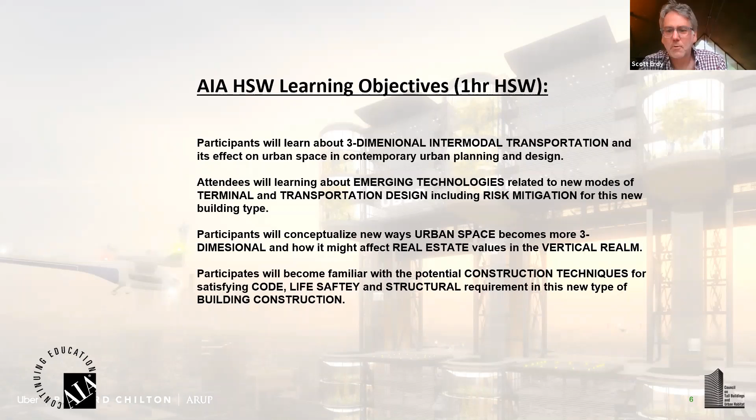So we've got two great guests here today. Jon Pickard, he's from the Midwest, where he would be called Pickard there. He's the principal of Pickard Chilton, a very interesting firm up in New Haven. They do a lot of really interesting things. In particular, the one we're going to talk about today is they were invited by Uber to prepare a concept design for their megaport. It's their vision of the next generation of aviation and expansion of what they currently do in terms of transportation for individuals.

He received his bachelor's from Iowa State University, his master's from Yale. He's lectured at a number of institutions and serves on Yale's School of Architecture Dean's Council.

Andrew Swartzell is an associate and director of computing technology at Pickard Chilton and does a lot of things. I imagine he's the one doing a lot of the heavy lifting on some of the data-intensive illustrations that you'll see. He's from Penn State University for his undergrad, got the Alpha Rho Chi Medal, and got his master's degree from University of Pennsylvania. Congratulations, a very good school as well.

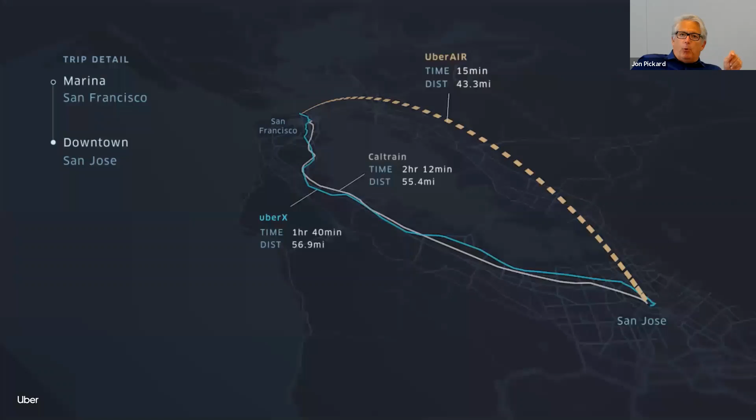So their hypothesis is nicely underscored in this image you see here. Why Uber Elevate? Well, it's really very simple. In San Francisco, if you're trying to get to a meeting in Silicon Valley, today you have to plan on potentially being caught in traffic for a couple of hours, or Caltrain for a couple of hours. With the miracle of Uber Air, or Uber Elevate, which is an eVTOL, you'll be able to go from a skyport at the Marina in San Francisco and magically land in the heart of Silicon Valley. And that's what we're trying to share with you today.

So what Uber has done is take their incredible analytics. You can appreciate that Uber has the ability to track, on a daily, hourly, minute-by-second basis, where the demand is and how they best serve their customers. We'll be able to use that information in strategically locating the new skyports that we're going to share with you today.

This whole initiative started in 2016 when a team was assembled at Uber to form Uber Elevate. Right off the bat they published this white paper, which is available at uber.com/elevate.pdf for anybody who is really interested in getting into the nitty-gritty of this. What they set out to do from the start is form a contingent of interested parties to come together and make this new mode of transportation a reality.

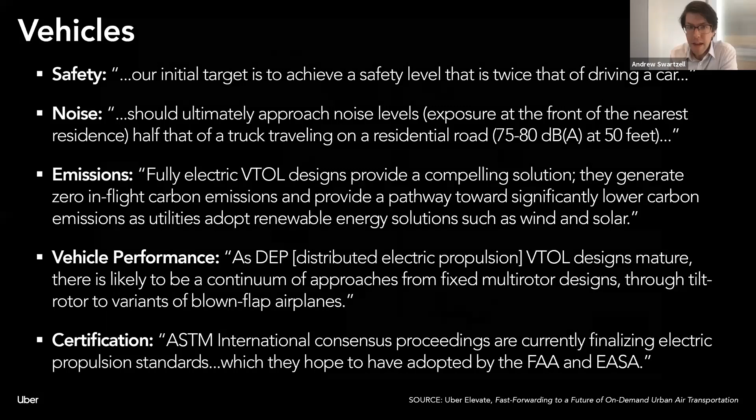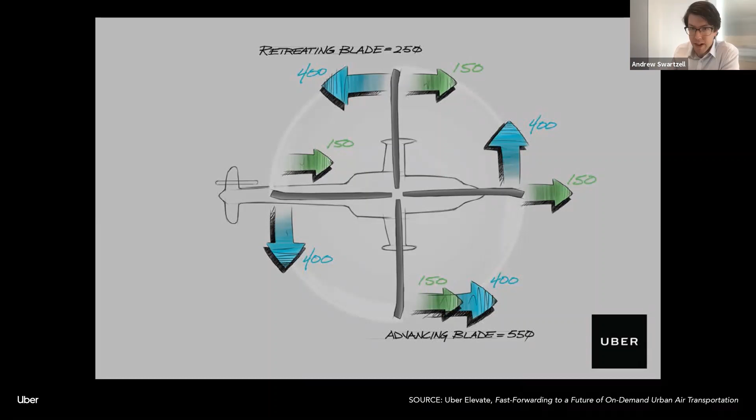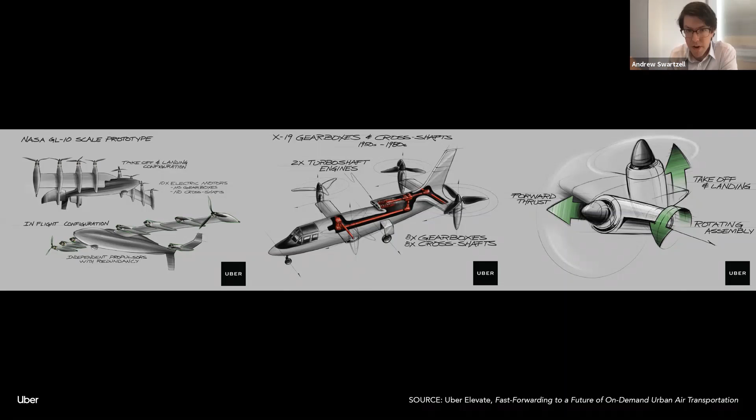What that does is it takes these gearboxes and cross shafts out of the design of the aircraft, and each propeller basically has its own motor. It makes it more redundant and, ultimately, safer.

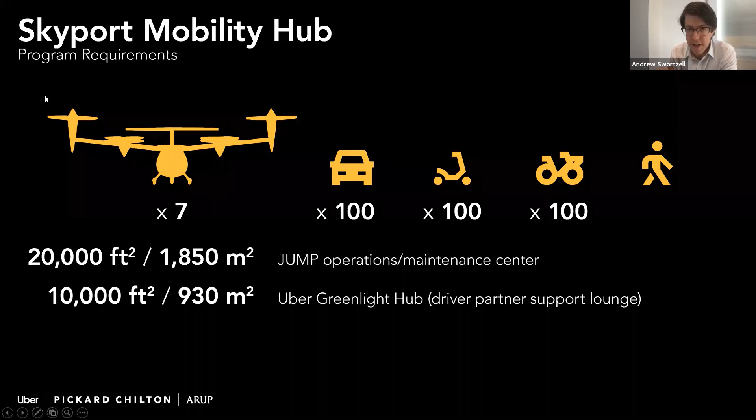The program for this particular hub is more modest than what we were seeing before, at just 7 aircraft, 100 cars, 100 bikes, and 100 scooters.

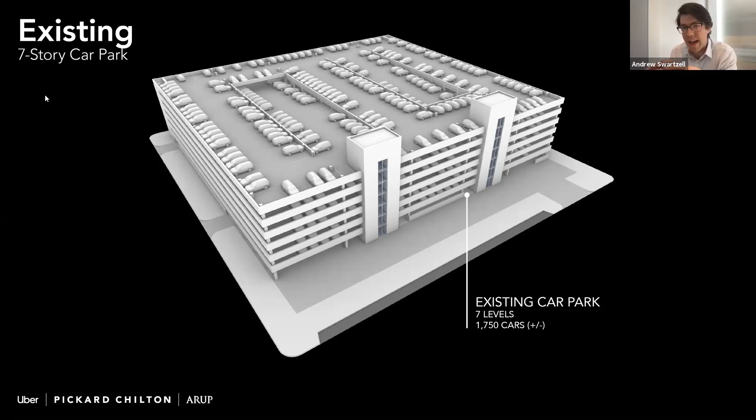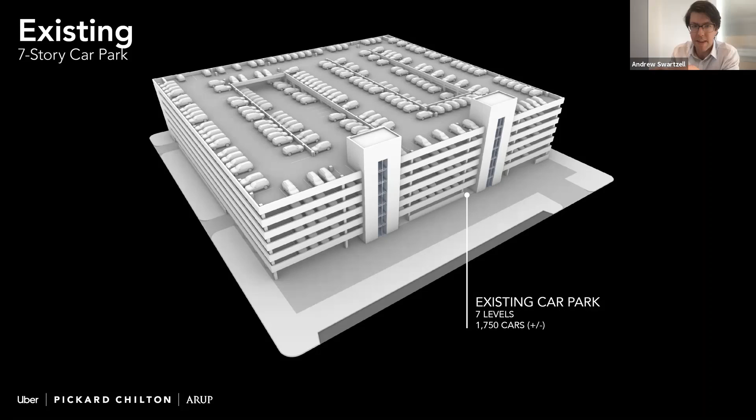What they asked us to do is figure out how to add one of these skyports on top of an existing parking garage. It's a piece of urban infrastructure that is there, and they wanted to make more use of it.

So what we've done is add a flight deck, if you will, to the top—an extra level to the parking garage—and provided a programmatic wrapper along the street front that activates the street. It's a responsible urban intervention, I'd like to think.

On the ground floor, we've taken over some of the spaces in the garage for parking of electric, Uber, autonomous driving cars, bikes and scooters, a cafe, and some maintenance facilities.

If you're a passenger on this network, what you would do if you arrive at the Sky Tower or the Skyport here, you would go into the Skyport lobby, rise up the elevator or take the stairs up to wait for a brief time at the Skyport Lounge.

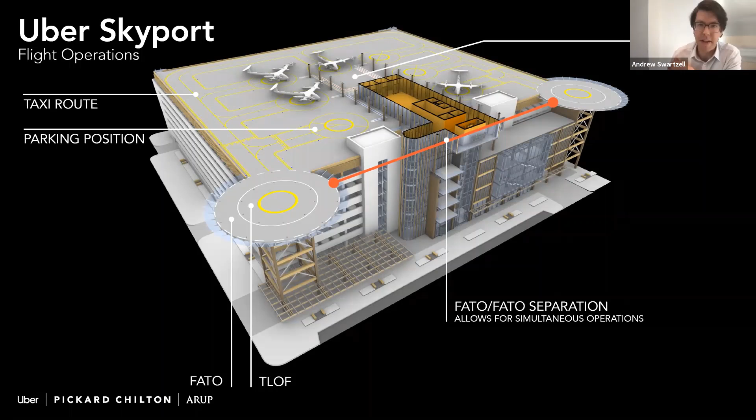There are two landing pads, which you would call FATOs or TLOFs, and there's a required separation to allow for simultaneous operations—two aircraft can land at the same time if they're spaced far enough apart. To maximize operational flexibility, there's a taxiway around the entire perimeter of the flight deck, and the aircraft would taxi in to be close to the Skyport Lounge.

Those little lines that radiate out from there are dedicated paths where passengers would walk and be guided basically to their waiting aircraft. This would all be taken care of and done through an app.

Uber is conscious and very aware and committed to making sure that whatever form this new mode of transportation takes, it has as little impact as possible on the local community.

That speaks to the context you'll find these skyports in. They may or may not appear on the top of new construction. They may very well appear on the top of existing parking garages.

In this case, and in the case of the Sky Tower, you'll see that we've been strategic in locating it near existing urban transit infrastructure. There's a rail yard here, and there are some highways.

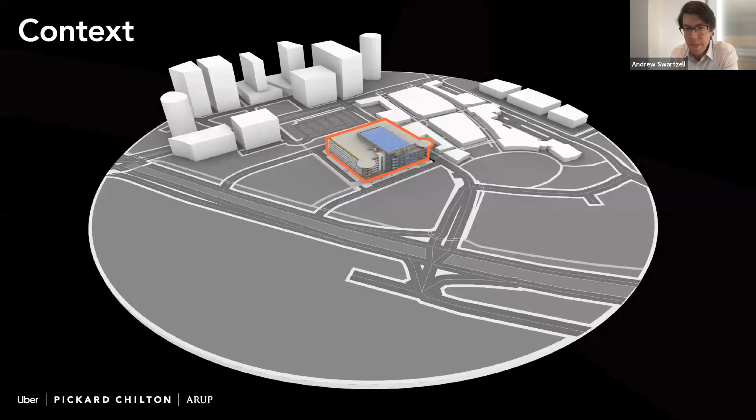The other thing that will be important in the development of these skyports in future cities is the flight paths necessary to get aircraft in and out. You can see these are the approach and departure paths as mandated right now by the FAA's helicopter planning guidelines.

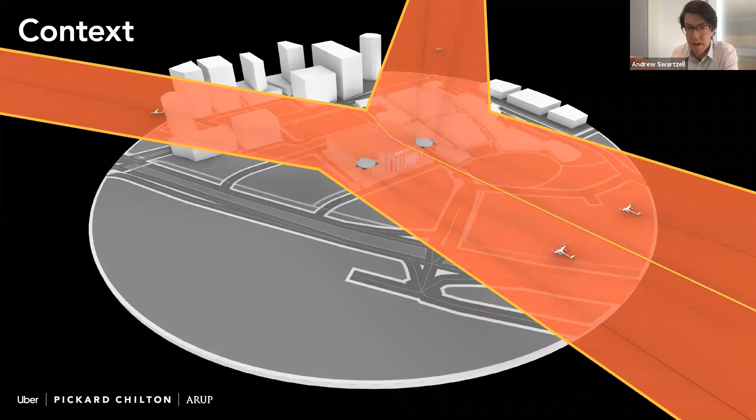These regulations might change with the development of these new aircraft, but what everyone has to work with at the moment are the existing regulations. You can see that will impact the height of future development in adjacent parcels.

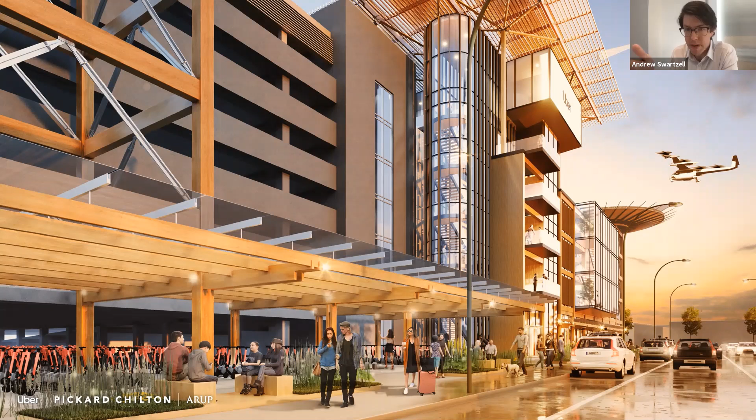Here's an image again of the street front. You can see the bikes and scooters. These skyports are really meant to be as plugged into and integrated with the community as possible.

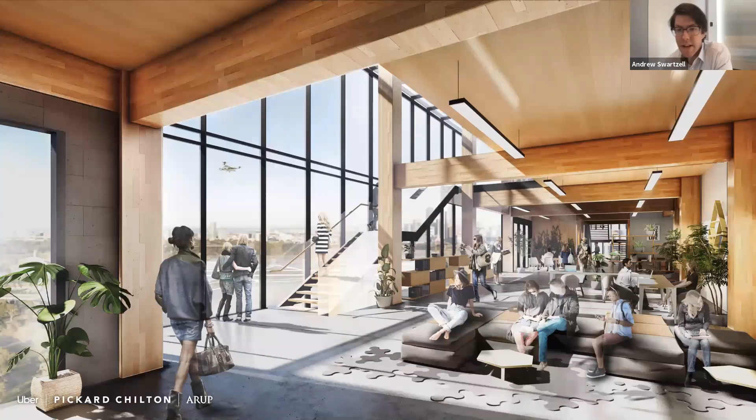There are additional amenities provided to Uber's driver partners. This is a view of their green light lounge. And there are certainly amenities provided to the passengers in a waiting lounge.

I think since this is all driven by an app, the wait is not going to be as long, we think, as it is right now at an airport. Arrival an hour beforehand is probably not going to be a consideration here in these skyports.

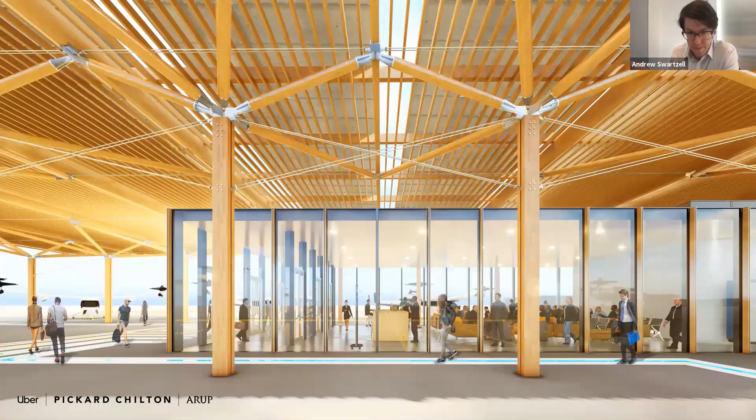Here you'll just see a few more views of the tarmac. One of the interesting things about this is that it really harkens back to the early days of aviation, when you would walk out on the runway and board an aircraft the way that we don't now. So there's something romantic about that.

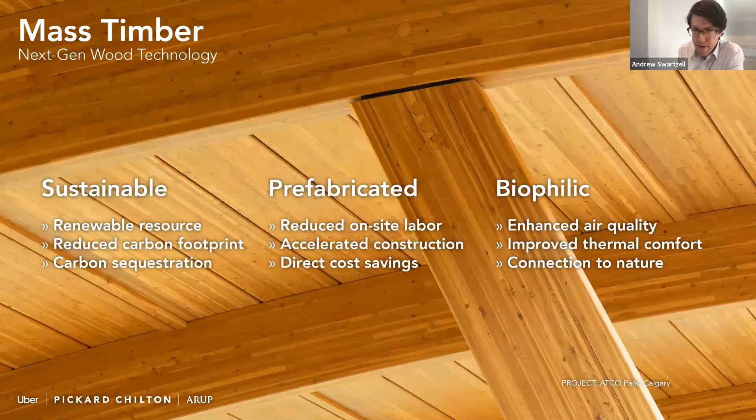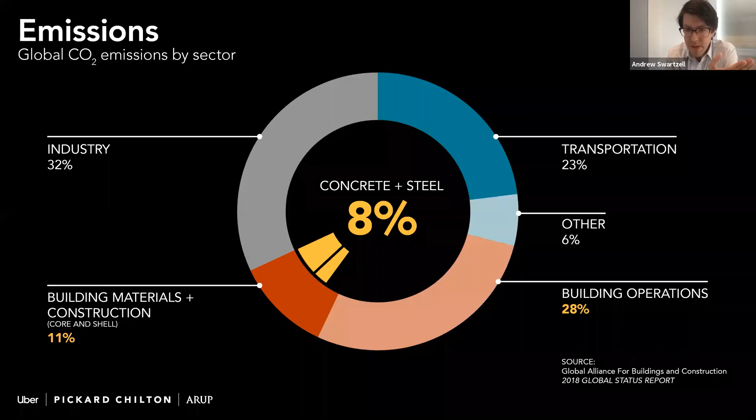You've seen in all those images that we have selected a mass timber structure for the structural system, and there are a number of reasons why we would do that. It's sustainable, it's prefabricated, it's biophilic, it's lighter than steel and concrete, since we're adding to an existing garage, and of course it has fewer emissions than the production of steel and concrete.

This is a conceptual design, so these are round numbers, let's say, but we've estimated that we've used about 95,000 cubic feet of wood. That equates to about 3,000 metric tons of CO2 offset. To put that in perspective, that would be the equivalent of 650 cars off the road for a year.

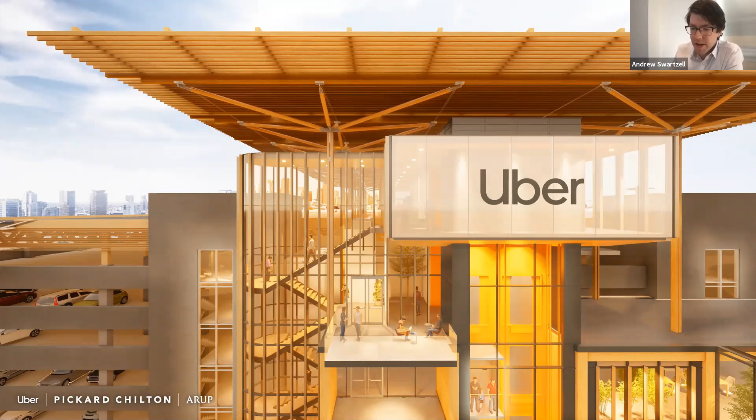This is one building, but it's one building in a network, and that network is going to be at least two, certainly more, numbering in the dozens, tens of dozens eventually.

Now I think we'll just take a quick flight to the airport and then a very long flight, 5 years into the future to Los Angeles, and Jon can talk a little bit about what we had proposed for Los Angeles in 2028.

You can take control, Jon. Okay, do I need to? You might have to play. Yeah, I was going to say... okay, it's not advancing. There we go.

So Andrew just talked about what we refer to internally as Skyloft, and it's achievable today. Interestingly, when Uber reached out to us a few years ago, they actually challenged us to look out a decade or more. They attacked the problem by saying, how do we solve the real problem, which is assuming we're going to be successful, how do we manage a profoundly different throughput?

A low throughput, with all due respect, easy peasy. But what they did is they painted a very, very challenging picture. And they decided, after this analysis, that there would be a few metropolitan areas where a facility like the Mega Skyport we're about to reveal will be an essential way of allowing Uber to best meet their customers' needs.

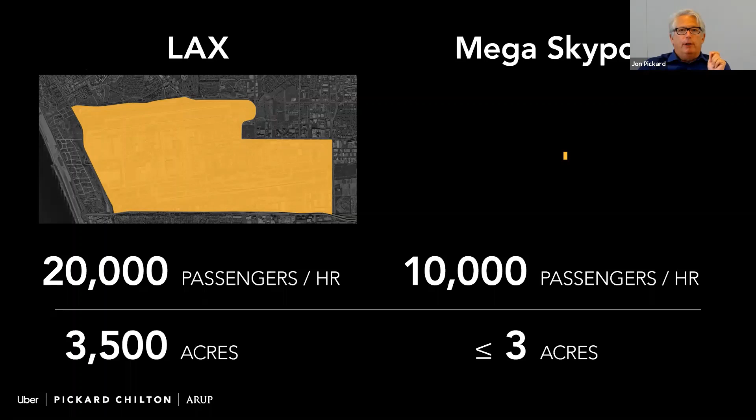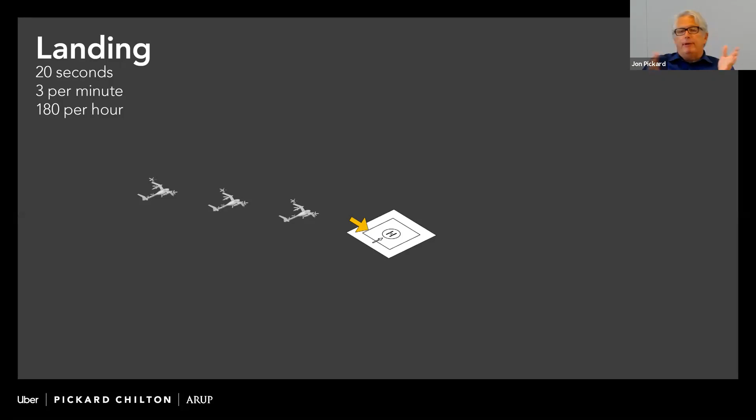So the puzzle starts off with the Uber team and their technical advisors determining that we can probably land craft at a maximum rate of 3 craft per minute, or each craft every 20 seconds. That's about it for landing. We can do the same thing in takeoff. That all makes sense. Where it gets tricky is the board and the charge time.

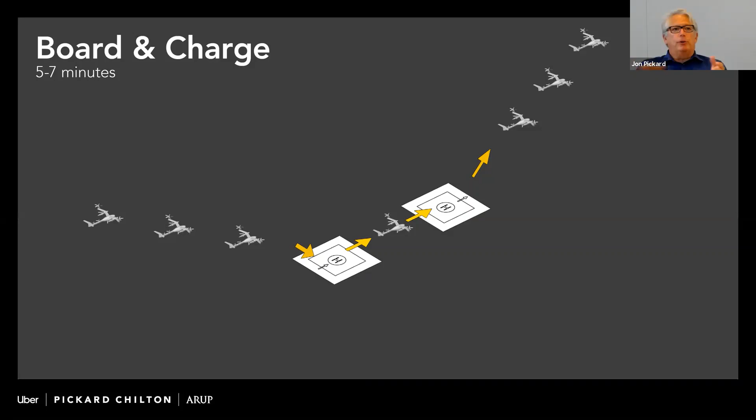Andrew talked about the batteries, and today the battery technology is advancing, but we have to allow each of these electric vertical takeoff and landing craft an opportunity to take a little sip of power when they land. We don't expect them to recharge to 100%, just take a little sip. It's going to take approximately 5 minutes to do that, and it also takes approximately 5 minutes to disembark the passengers and load up. It's that time that's the biggest challenge in managing throughput.

So we've talked about how every 5 minutes we've got 15 landings. That's a good start, but it doesn't do it. That little yellow zone shows what 3 acres look like, so it can handle that kind of throughput, but it cannot handle the 10,000 throughput landings that Uber required. So what do we do? We had to think differently.

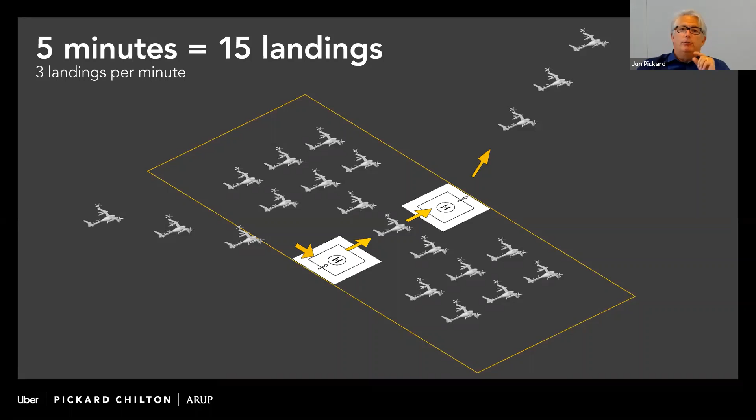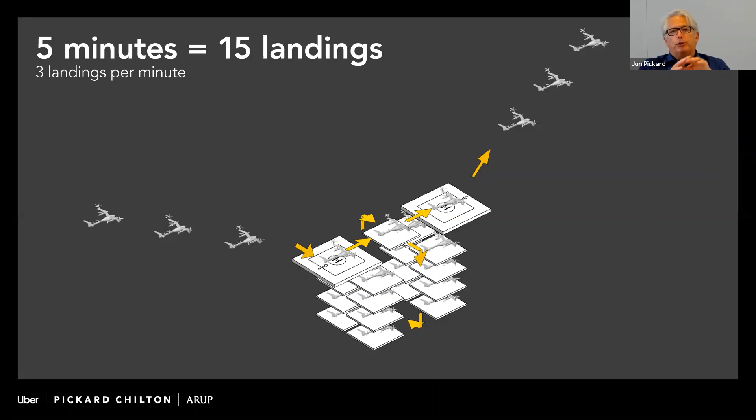The solution was to work 3-dimensionally. Looking back now, I say, well, this is so obvious, but when we were starting this a few years ago, it wasn't so obvious. Some of the breakthroughs came with one of our colleagues at Arup, a former military helicopter pilot, who helped us think about breaking down the vertical dimension. That was one of the keys to the solution we're about to share with you.

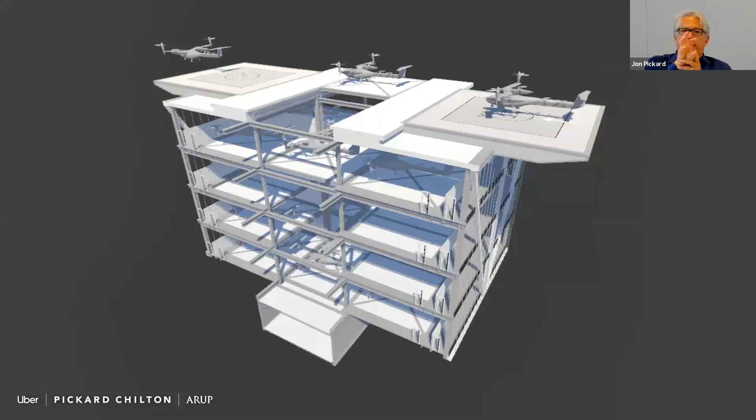So what we have is, you'll land on the TLOF, the vehicle will move a few feet over to the mobile charging platform, and it will descend down into the system. People will disembark and load up. One of the things we're positing is there'd be a little element: as soon as the craft is on the mobile charging platform, it locks in. So the entire time the craft is there, it's taking that sip of power it needs to do its job and move on to the next trip. That's really the breakthrough.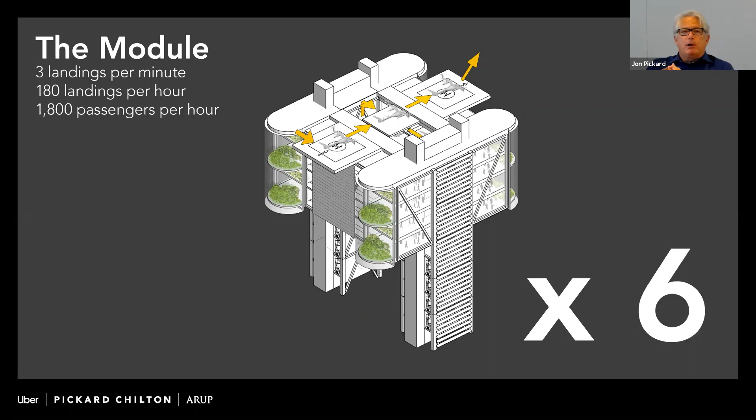So then we said, okay, that's a module, but we need to increase the throughput. I'm not going to waste too much of your time about all the details of how we solved the architecture and vertical transportation, but the Arup and Pickard Chilton team designed a mile-high tower in the heart of the Middle East, so this is a relatively straightforward challenge to solve some of these problems.

So what we did is we took that module, and in order to get the throughput, you do the arithmetic, you need 5.5 modules or 6 modules. That creates the prototype we feel can now be developed within the issues of the site, the specifics of the context, the politics, zoning, flight approach patterns, and of course cost. Those will be the elements that ultimately drive what we can expect to see in maybe another decade or so. So you might ask, how would that work in the heart of a major metropolis?

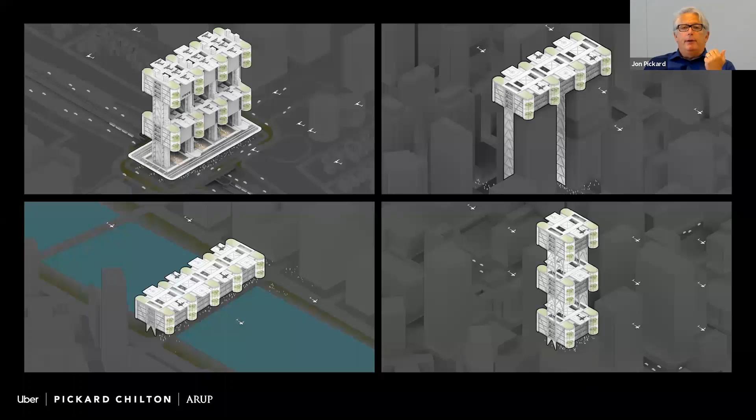I think for us, the most thoughtful, respectful way to begin would be the image on the upper left, which shows the sky tower perched above an overpass on an interstate system. Obviously that overpass would be enhanced, and what that allows us to do is really integrate back into the city. One of the things Uber is particularly concerned about is not only safety—safety to their customers and safety of the city is paramount—but also not making an undue impact on the acoustical environment within our metropolitan areas. By locating a sky tower over an existing expressway, we begin to mitigate that.

Of course, this is just looking forward to some potentials, a little tongue-in-cheek—I'm not sure this would really happen in the heart of historic London—but it also raises a potential which, in most of our studies, is really solely about the sky tower Uber issue. It's my belief that when these facilities are unveiled, they will be part of an integrated development, meaning there will probably be retail, office components, hotel, residential. So like so many of the mixed-use, transit-focused centers that Pickard Chilton is designing today, this will be a kind of next-generation facility.

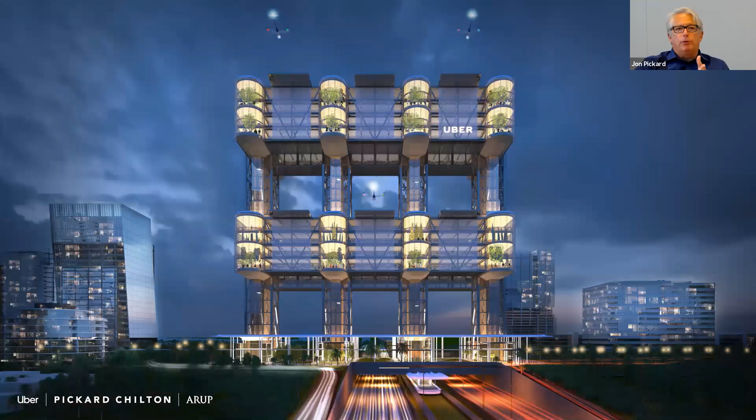Whether it's London or on a slightly more moderate basis here in the heart of Ross Perot's Victory Center in Dallas, the Sky Tower can make a big difference as it feeds these metropolitan areas. So here you are, approaching it on the interstate, you've got the 3 TLOFs before you. Those round things are the gardens - a garden at the base and a garden in the air for the customers to experience.

One of the secrets to the throughput is how do you organize the craft coming in. The FAA has limitations on aircraft separation, typically horizontal, but we're applying them into the vertical dimension. As people load into the Sky Tower, you'll have 3 aircraft in each of those positions, phased 20 seconds behind another 3 aircraft coming in. So no aircraft is ever above another one - they're always slipped off to the side. To get the throughput, you have to have an extremely carefully managed system.

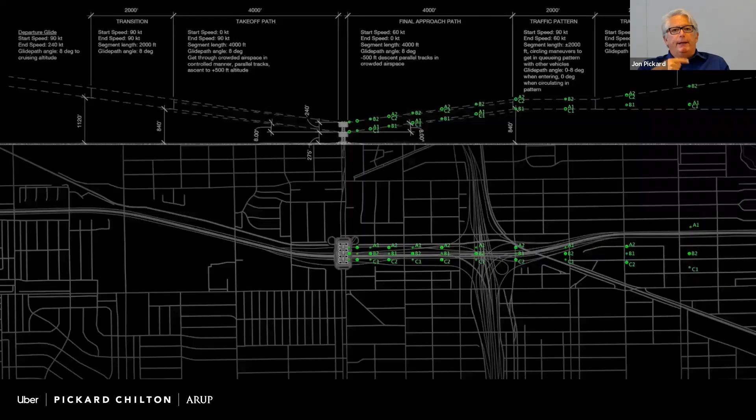What you're seeing here is the top image is a section, and the bottom is a plan. You're watching the craft land into the Sky Tower, and there's a lag - this is 20 times the real speed. There's a lag here as they're doing the 5-minute recharge. Then in a few moments, you'll see the aircraft - they've done the passenger boarding, and they'll start to launch out and head off to their destination.

The Sky Tower does lots of things well. It keeps the aircraft up and away from other people, but it also does a great job of protecting the acoustic environment - those little bubbles reflect the 67 dB target that we hit. Even today, ignoring existing traffic sound, if you're standing at the base of the Sky Tower, you'll barely hear it. It's the equivalent of an electric Prius driving by at 35 miles an hour - it's going to be very, very quiet.

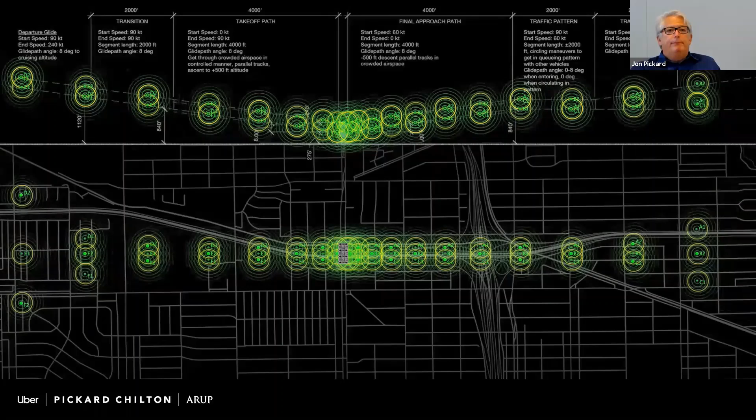So here we are, we've got a sort of a dynamic view of the Sky Tower. What's important is how the Sky Tower can really lock in to the character of the cities. As design architects, we spend much of our energy designing skyscrapers, and it's very important that this is a building that contributes to the positive vitality and character of the city. We believe that the Sky Tower will absolutely do that.

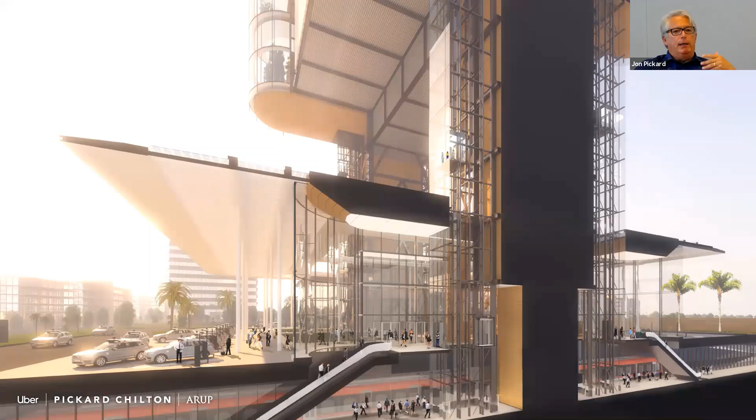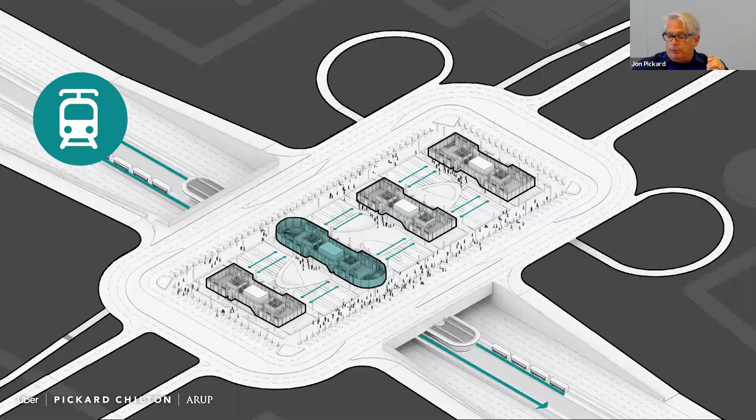It's important that the customer experience is fabulous. In the case of this study, it'll be located on the metro line in Los Angeles. You're seeing those escalators that bring you up into the ground floor, and you can see the UberX queuing up there on the ground plane. It'll be integrated with buses, bikes - everything comes together in this facility. Then finally, you'll unload safely with the electric cars.

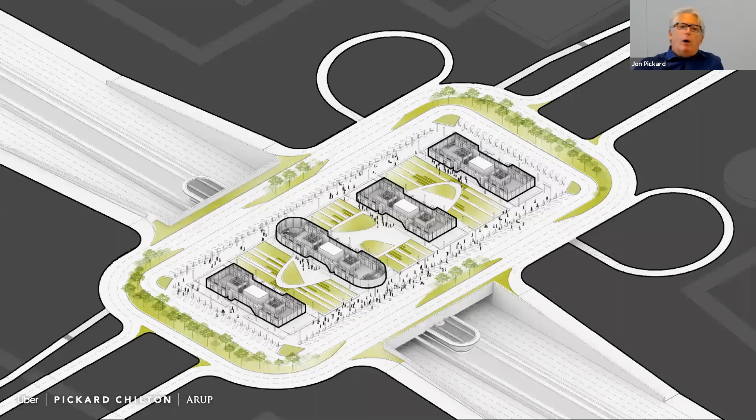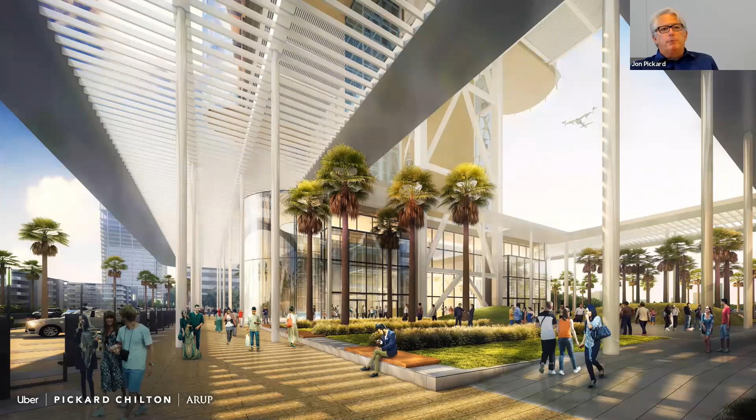Because we're creating this, why not provide a garden to the community that would provide a positive experience for the customers and a positive experience for the adjacent neighbors. As you move through the system, you come out of your UberX into this beautiful environment, protected from the climate, but we're not proposing we build lots of fancy, expensive, unnecessary terminals like you might in a major airport. You're basically moving through the garden - Los Angeles and their climate allows that to happen a little more easily. So you'll move through that.

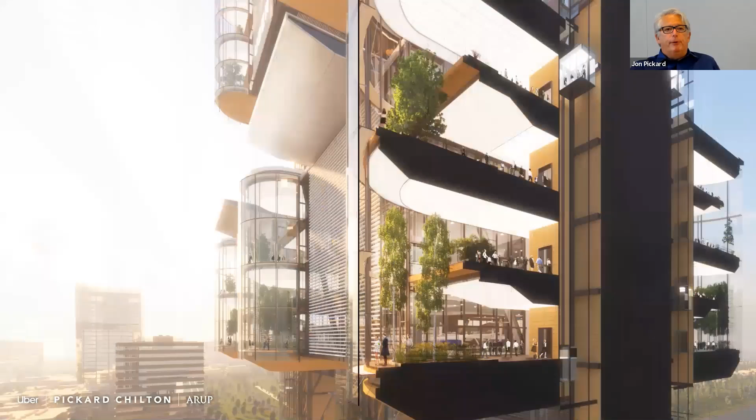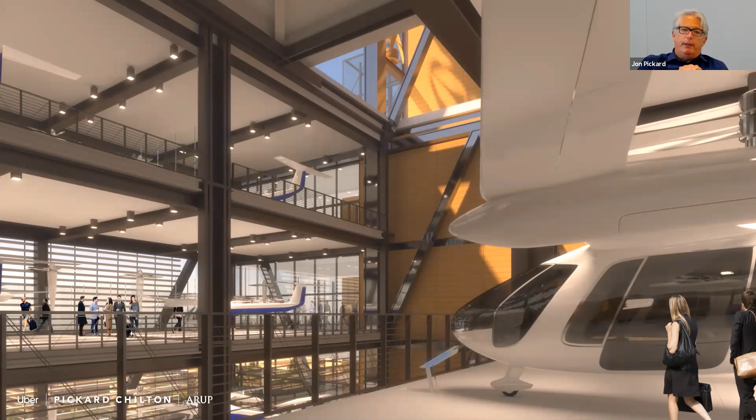Here, we have a beautiful garden at the base, and a beautiful garden in the sky. As Andrew mentioned, we don't expect that you're spending a lot of time there, because the app system should be very efficient. But even the few minutes you might spend there, we want to make it beautiful and uplifting. Ultimately, in order to manage the throughput, we literally have these craft parked for a few minutes to allow for the charging, but the boarding process is fully protected. You're out of the flight deck, down below, so passengers can flow out and get into their craft safely.

Finally, we want to share this image or this video with you. This is a bit of a sense of what it would be like to experience Uber Elevate. The video was created by Uber to kind of paint that picture.

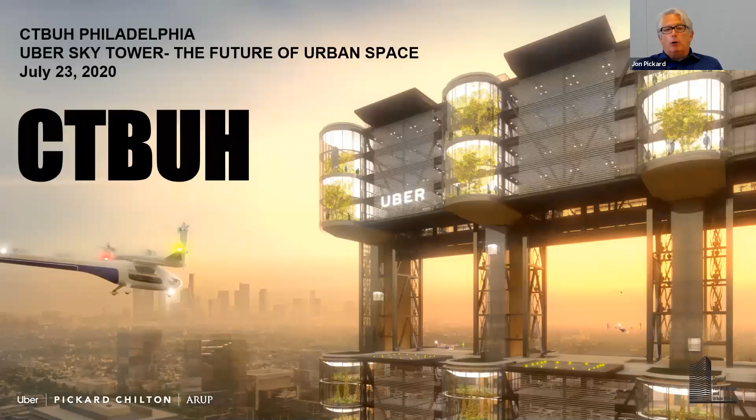You would only build a Sky Tower in a situation where the throughput was so important and the land so limited that it was the only solution, because it's going to be more costly. It might only happen in a few places in the world. Other facilities might be on 6 acres and much lower, and we'll have to work that through. The challenge was they threw out the gauntlet to say, okay, you've got to do it all in 3 acres, and that was the result.

It's super interesting—a lot of the questions are trending towards this idea of adapting it into other building types. You can imagine, just like now at the airport there are dedicated Uber pickup spots, in cities and in different large buildings. So one could imagine these things starting to really disseminate. It might be that a heliport or one of these ports has a throughput of maybe 10 per hour or something like that.

But think about how many Uber vehicles there are, and they do reduce traffic because trips are being consolidated. So I think it's super interesting in terms of what that could be.